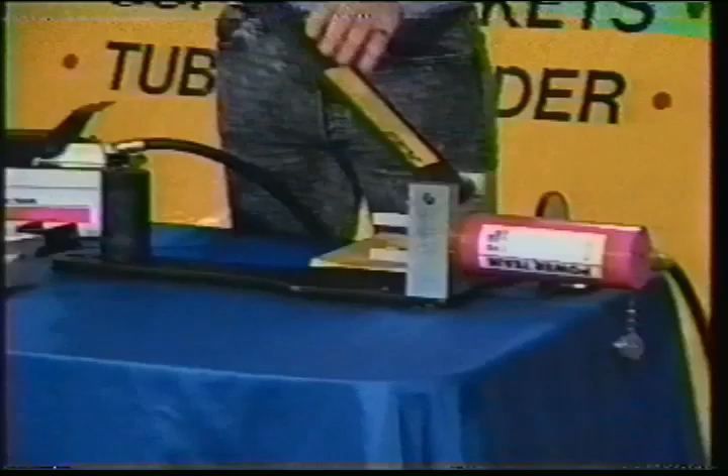First thing we're going to cover is the actual bender itself. The bender has the ram up here, and it's a 25-ton ram, which is what actually does all the work. It's bolted onto the framework here, and if you notice, this top arm of the framework actually opens up, allowing us to load and unload the shoe, the follow bar, and the tubing itself.

The shoe—this is a 1.5 inch shoe—is made out of a solid piece of aluminum. This is a lifetime shoe; this puppy's not going to break on you. When we load it in, we just line up the hole on our ram and our shoe, and we drop in the pin.

Next comes our follow bar, set up with these two little tabs on it. The tabs keep the follow bar the same height off the surface as our bending shoe. Then we can lower the arm and drop in the pin. Later on, when we load in the tubing, we'll also be putting in the horseshoe, which fits right here on the front and will actually hold the tubing.

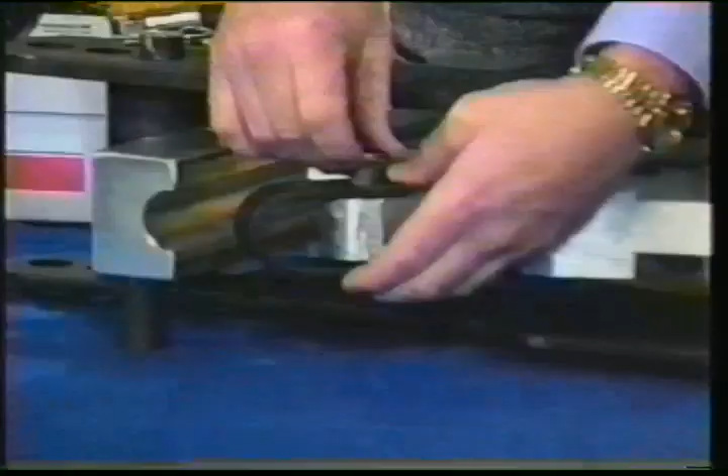The whole thing is run by our pump here, an air-over-hydraulic pump. This means there's a hydraulic reservoir down here on the bottom. When we put the air to it, the air is used to pump the hydraulic fluid around and expand the ram, which drives the shoe down. When we release it, we just kick it forward and it'll slide right back. This automatic release is a real nice feature.

What that allows you to do is make your 90-degree bend, and when you're all through, you can just release it and it will pull the ram all the way back. When we get into checking spring back, which we'll be doing in a few minutes, you just need to come up and release it and then right back down. What we're doing there is taking the pressure off the ram, but we don't want the ram to retract all the way back down.

I need to cover a couple things here that are real important. This ram generates up to 25 tons of pressure. This pump can generate up to 10,000 pounds per square inch of pressure. Both of these need to really be respected.

Make sure that all of your pins are in and pushed all the way down. The other thing is, take good care of your hydraulic hose here. Don't be dropping material on it, don't be scraping it up. If it gets worn, replace it. Do yourself a big favor and replace it and keep it in good condition.

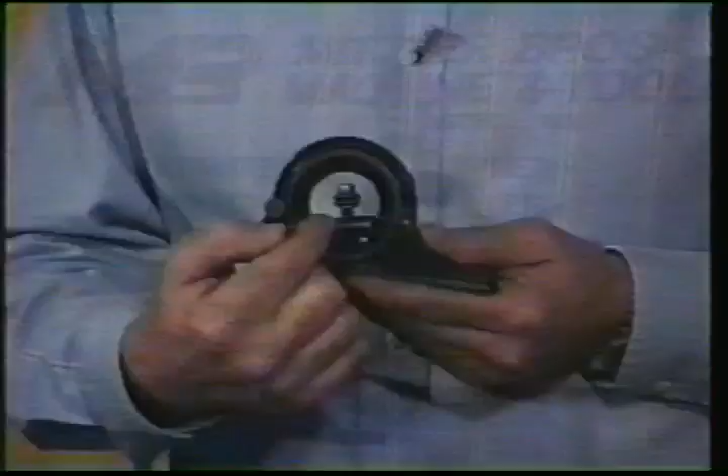If you want to upgrade a little bit, you can go to the Starrett. The Starrett has a bubble here on one side. On the back side, it actually has the degrees marked out so that you can loosen it, change your degree, find exactly what you want, tighten it up on the back side, set it down, and read the bubble.

The one that I choose to use is the digital angle finder, by Smart Level. It accurately reads to half a degree what your angle is. The nice feature is when we get into springbacks, you can dial your spring back in exactly. When we flip this upside down, you'll notice that the reading flips upside down with us. Those are just a few of the things that will make your bending much easier.

Since we've got all of the tools covered, let's go to the whiteboard and talk about some other terms. Here's a few more terms we need to be familiar with, so we're all on the same wavelength: stub height, leg length, radius, developed length, gain, and setback.

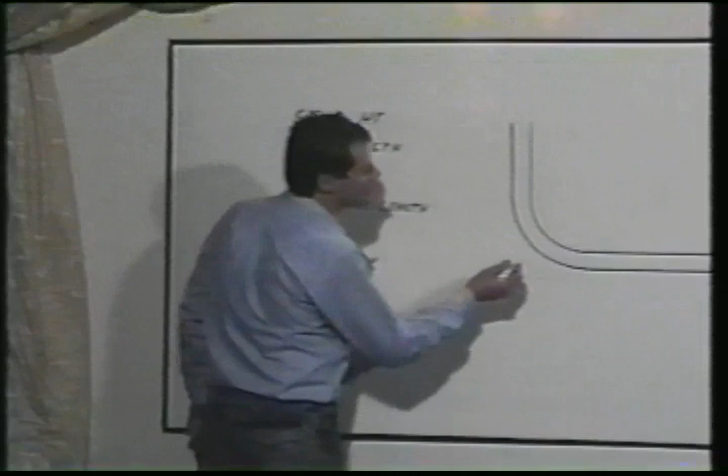When we refer to stub height, which can also be called stub up or rise, all we're talking about is the length between the bottom of the pipe or tubing up to the top. So it's this vertical measurement here, and that part is our stub up, our stub height, or what we call our rise.

When we talk about leg length, it's the horizontal measurement - the back of our tubing to the end of our tubing. We won't be referring to leg lengths very much in this video, but it's something I think you need to be familiar with.

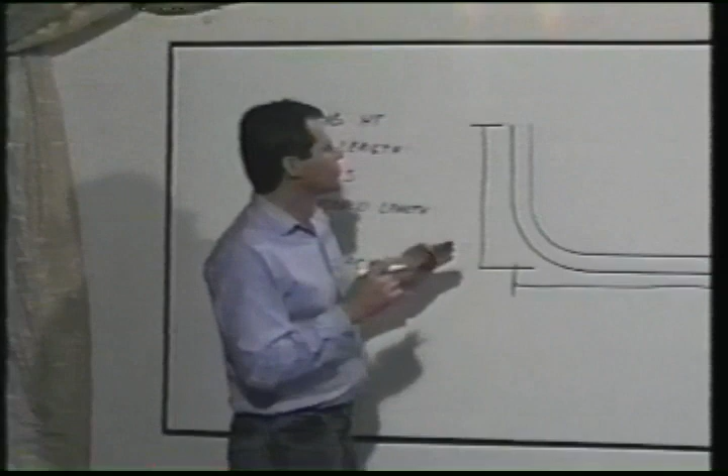When we're talking about radius, the actual formal name for this is centerline radius. We're going to assume that anytime we say radius, we're talking about the centerline radius. So in our bend here, it would actually be the center of our tubing, and it would look something like this - this is our centerline radius that we'll refer to as our radius.

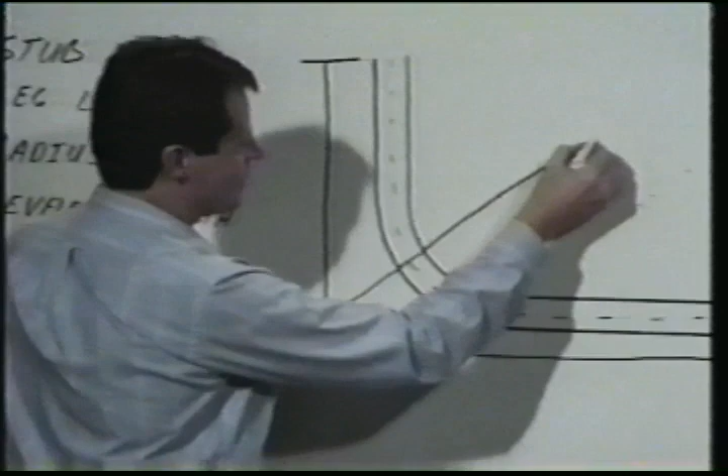Now, the radius is measured from the center of our tubing out here to a point that's on a 45. So when we say a 7-inch radius, we're talking about 7 inches from the center of this tube out to a point. If we're talking about an 8-inch radius, then this distance would be 8 inches.

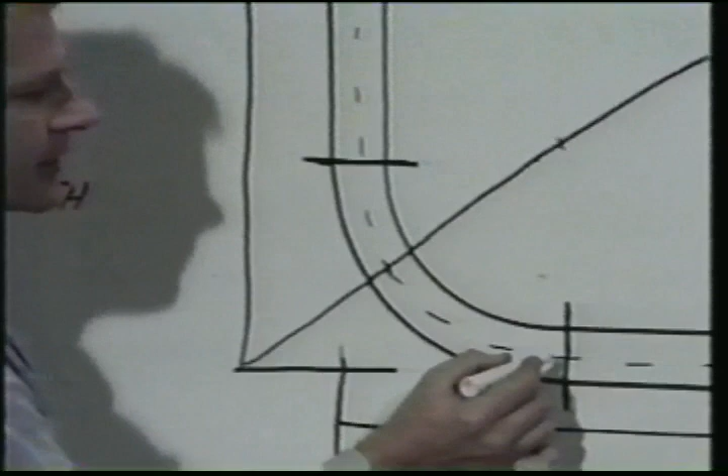When we talk about developed length, we're talking about the actual amount of tubing that's being bent in this process. In our example here, the tubing starts to bend right about here, and it finishes bending right about here. This is also measured on a center line. So when we say that we have 12 inches of developed length, what we're talking about is there's 12 inches of tubing being used to actually bend this bend up. From here up it's straight, and from here back it's straight.

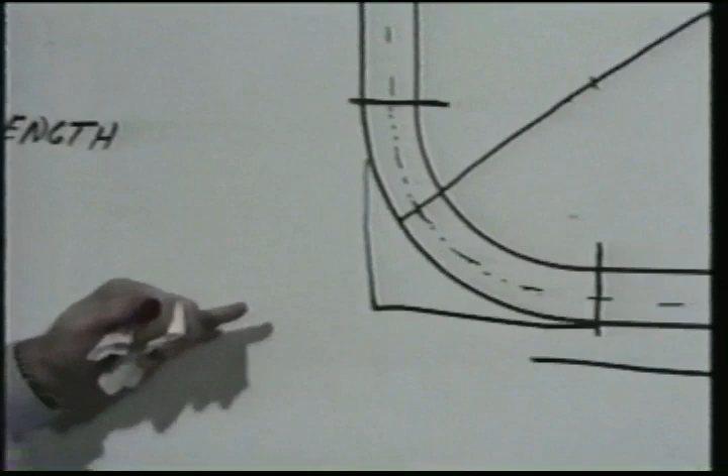The next thing on our list is gain, and gain is probably the most misunderstood thing when it comes to bending principles. And it's really pretty simple. If we had a straight piece of tubing here, and we bent it at a 0 radius, 90 degrees here - in other words, we came straight down, bent it, and went straight out this way - it would be a longer distance between here and here than it would be by cutting across here.

This is like when you were in junior high and you're racing your buddy home, so you're running down the sidewalk and you get to the end of the block. You choose to go clear down to the end of the sidewalk, staying on the sidewalk, turning and going up the next block. Your buddy, he's a little ahead of you, and then all of a sudden he veers off and cuts across the neighbor's lawn. So what he does is he gains some distance on you. He comes out way ahead of you because he has a shorter path to go than you do by staying on the sidewalk and going clear around.

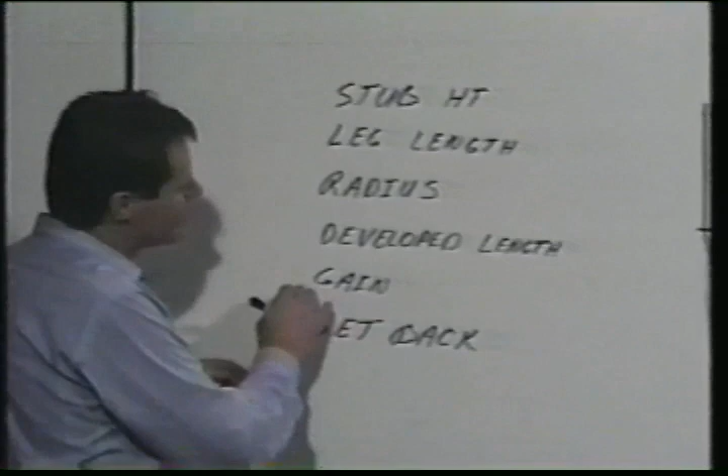Both gain and developed length, we have some very set formulas that we can actually figure out exactly what the gain and the developed length are for any bend that we choose to. We'll cover those a little bit more in detail later on.

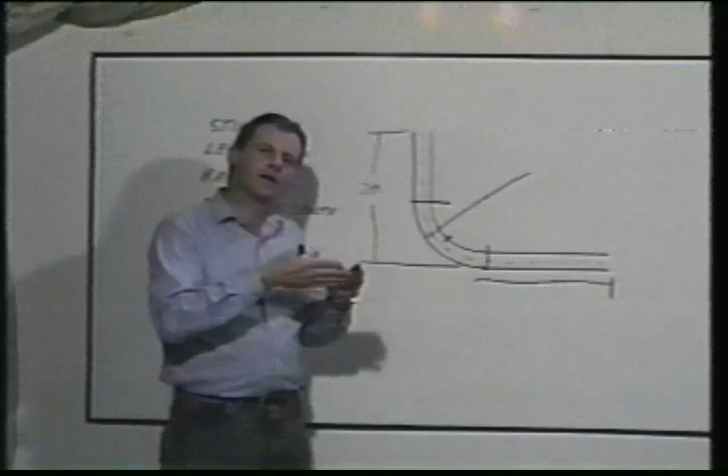That brings us down to setback. What setback is, is the distance that you subtract from your stub height to get your shoe to start bending in the proper place. So if we came down here and we wanted a stub height of 20 inches between the top and the bottom here, we couldn't go out and put a 20-inch mark on our tubing, start our shoe there, and bend it up. We would come out way over.

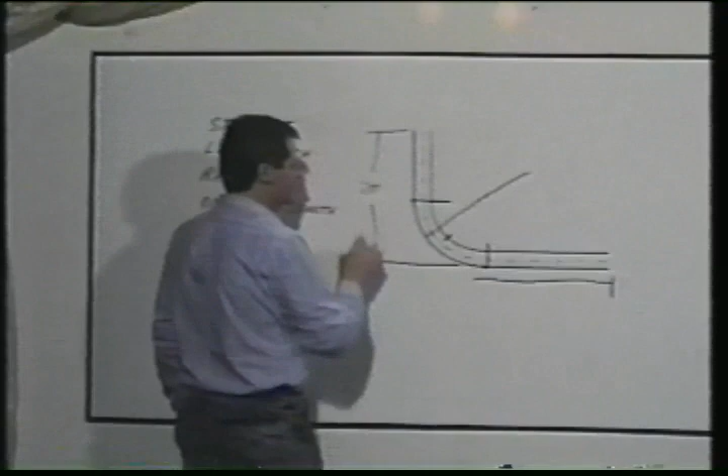The reason we would come out way over is because of the developed length and the gain that we talked about earlier. Remember, the center of our bend is right here. From here up to here, we have 1/2 of the developed length. Since our shoe starts bending at this point, we have to subtract 1/2 of this developed length from our 20 inches. Plus, we would have to subtract the gain, the shortcut here, from that 20 inches. We'll be dealing with this a little bit more in depth later on.

There's 2 ways to actually figure this setback out. One of them is mathematically, the other one is a practical application. What we're going to do is we're going to go put a 10-inch mark on our tubing. We're going to put that on the bend line on our shoe. We're going to bend this up at 90, and the difference between the 10 inches and what we come up with as a total stub height after we make that bend is going to be the setback for that particular shoe.

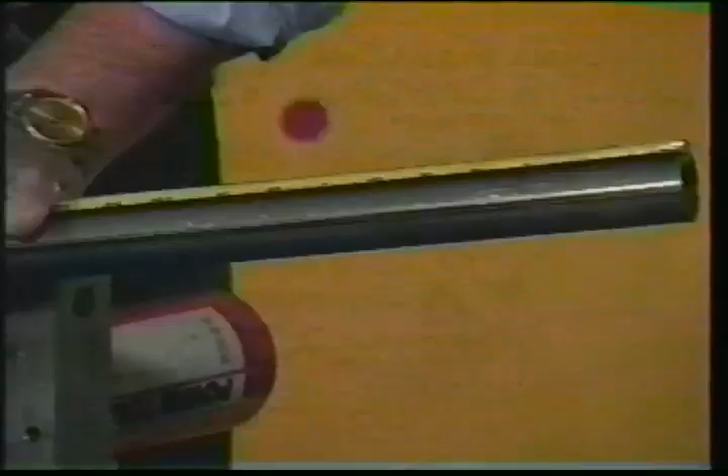Now we're going to get down to some real serious stuff. We got our sleeves all rolled up and we're going to find our setback. To find the setback, the easiest way to do it is just take a piece of tubing and we'll come down here to 10 inches and we'll make us a mark. And I always like to take and circle a bend or a cut mark. That way it makes them real easy to find.

After we've located our mark, we're going to go ahead and load the tubing into the bender. We just take our horseshoe here, and we don't worry too much about the mark. We slide our horseshoe on, drop our pin in, and then pull it back. Now our mark is right here, and what we're going to do is we're going to line that mark up right even with the face of this step. That'll always be where our start mark goes.

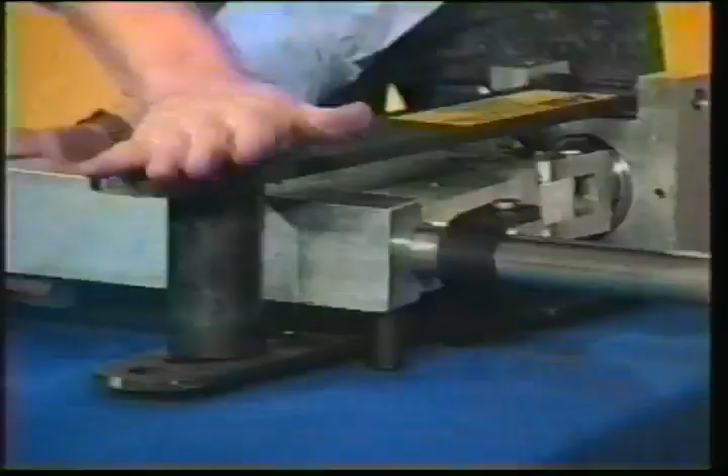Once we've got that done, we'll put in our follow bar. Our follow bar needs to line up so that it's also even with this face. Once we get it in, we line up our roller, drop our pin in. At this point, we're going to stop and make sure that the pin for our shoe, our horseshoe, and our follow bar are all the way down. Now we're going to go ahead and put some pressure on it.

We're starting to bend there. At this point, we want to stop and stand the bender up, and the reason is so that we can accurately read our measurements on the degrees. We want to have put quite a bit of pressure on so that when we stand this bender up, all of our pins stay right where they belong.

The other thing we want to do is raise this up, the back end up, so that it's level. So we'll bring some blocking in here and put our little torpedo level on here. We're a little bit short, so I'll throw my pencil in, and that brings this right to level. Now we can go ahead and take our smart level and just wait for us to come up to 90 degrees.

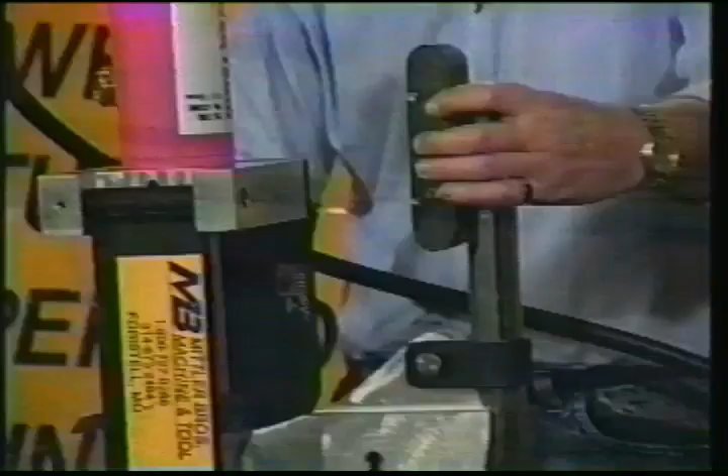What we're going to do here is actually go past 90 degrees. And that's our 92 degrees right there. Now that we're at 92 degrees, we have to release the pressure on the ram to take out our spring back. As we said earlier, you just want to hit the release button and make sure it doesn't stay down, because that would retract the ram all the way, and that's not what we want to do. So we'll take just a little bit of the pressure off, go over here and check. Our leg here is still level, and there we've got a 90-degree angle.

Now we have to measure it. So to measure it, we got to get it out of the bender first. So we'll be laying everything back down on the table.

You're going to notice that there's a lot of possibility of finger pinching here. Many times bending is done with a couple of guys around, and they always want to reach in there to help you out. If you want them to remain good friends, please don't allow them to. Only one set of hands on the bender. This is an ironclad rule, because with opening and closing these things and moving everything around, it's real easy to get your finger in there, and if your buddy thinks this piece of pipe needs to be raised up a little bit and he raises it, squash — you're no longer friends. So what we're going to do is take this out, get the bender off the table, and measure to see what our stub height is.

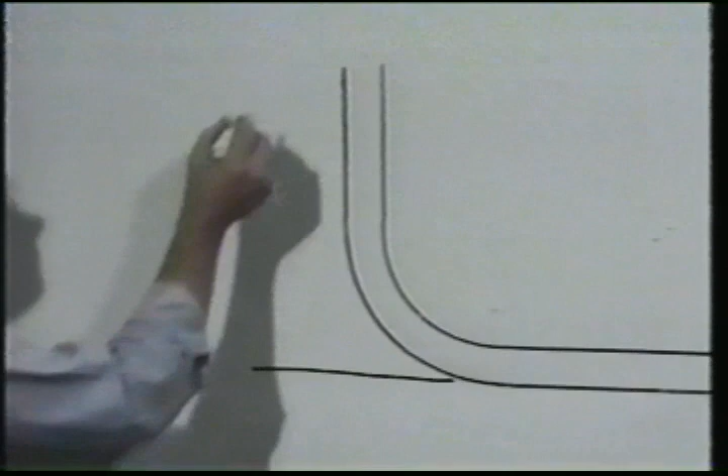We want the distance from the top down here to the bottom to be 12.5. All we have to do is take our clean piece of tubing here, measure from the end of the tubing back 12.5 inches, and make a line. Then we'll take our setback, deduct our 8 3/16 of an inch, and that will be our start line on our bender. That's all it takes.

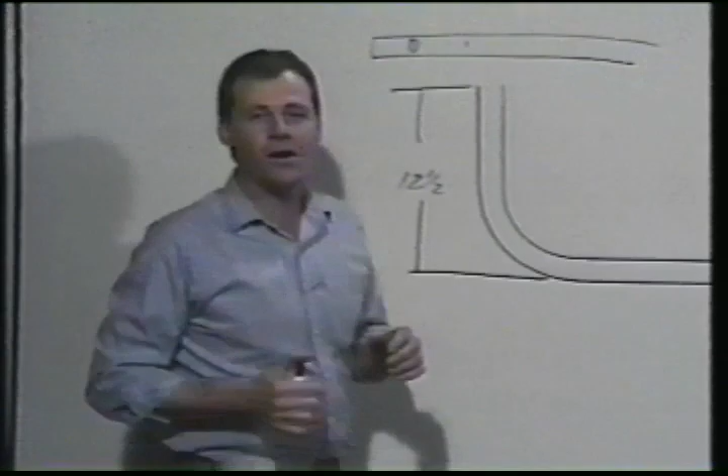To lay out our 12.5-inch stub height on our pipe, the first thing we're going to do is come down here and make a line at 12.5 inches. This is not going to be a bend line, so we're not going to circle it.

To get our 8 3/16 deduct in there, we're going to use a process called cutting an inch. It's very difficult to get the very end of the tape right exactly on the line. So what we're going to do is line up our 1-inch line with our 12.5-inch line. So we've cut or deducted an inch on the front.

So we're going to go back here, and instead of making our mark at 8 3/16 of an inch, we're going to make it at 9 3/16 of an inch. So what we did was we deducted an inch on the front, and added an inch on the back just to make things easier.

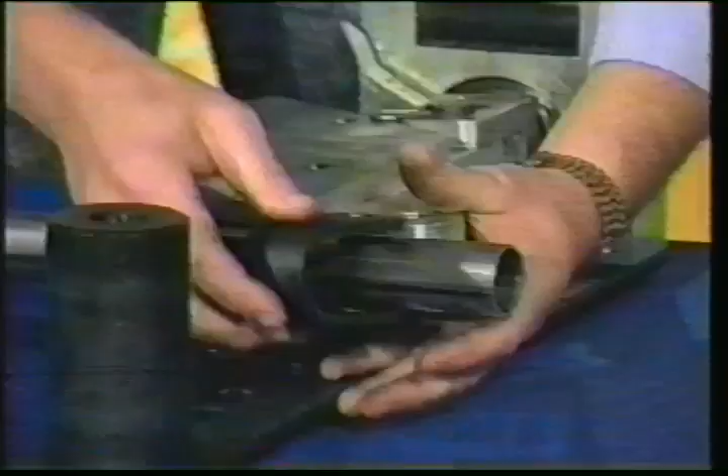So now we have our 12.5-inch line minus our 8 3/16 for our setback. We'll go ahead and chuck this up in the bender, put on our horseshoe, and drop in our follow bar, and we're ready to bend.

After we get our follow bar in, we want to make sure that our pipe and our follow bar are both at our bend line. Go ahead and slide the roller in here, drop in that pin, and put some pressure on it.

You notice that we lost a little bit here when we got down close, so we have to readjust things, making sure our line for our start bend is right on the place, the raised section of the shoe, and our follow bar is there, and we're ready to bend.

Now comes the time of truth. Did we hit our bend? What we're going to do is measure it up, same way as we did before. We want to measure from the back of the pipe here to the top of our stub. So we take our straight edge, set it back there, and we measure up, and we came out to 12 3/8 inches. So that's within 1/8 of an inch of what we wanted. That's well within our plus or minus 1/4 of an inch for accuracy.

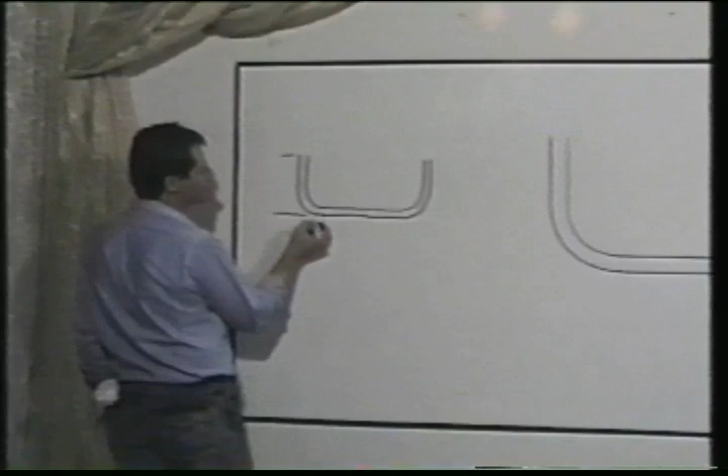To make a U-shaped bend or a hoop or a back-to-back bend, we're just going to repeat the same process. What we're shooting for here is we want this hoop or U-shaped bend to have legs from the bottom to the top of 12.5 inches.

So we've already bent up one piece. We have the piece here. We want this side over here to be 12.5 inches. And then we want from the back of this one to the back side of this one to be 36 inches. So this is 36 inches overall.

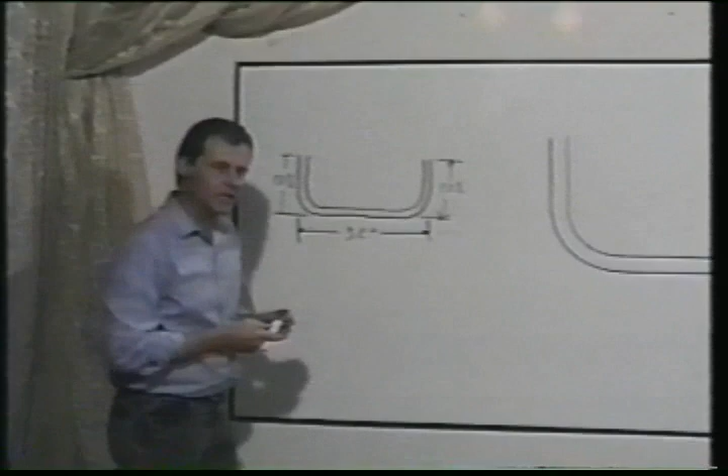To accomplish this, we're going to use the same thing that we did over here. So all we have to do is, before we wanted this to here to be 12.5 inches. We laid it out at 12.5 and we subtracted our setback, or our 8 3/16.

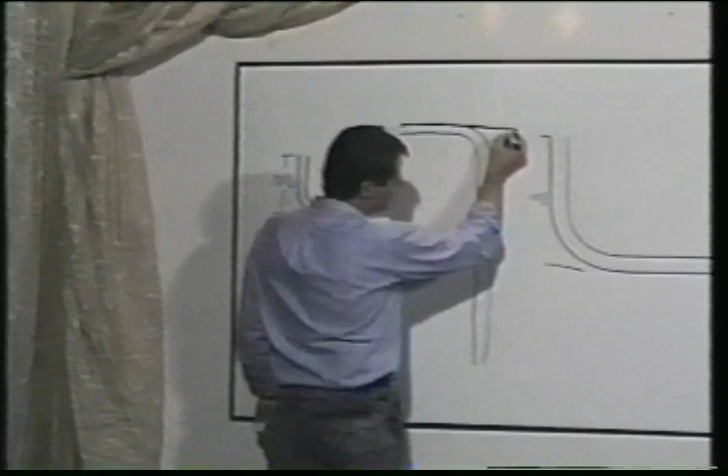To make our U-shaped bend, we're going to lay our tubing in here like this. And we're going to take a straight edge and put it right along the back side here. That's going to be our measuring point. That's going to represent the same as the end of the tubing on our first bend. Then we're just going to come down here at 36 inches, and we're going to make us a mark.

Then we take from our 36 inches and subtract our setback of 8 3/16 of an inch, and that becomes our bend line. So when we put this in the bender, this is where the bend line goes on our shoe. When we lay out for our U-shaped bend, we want to make sure that our straight edge goes right against the outer part of our bend here.

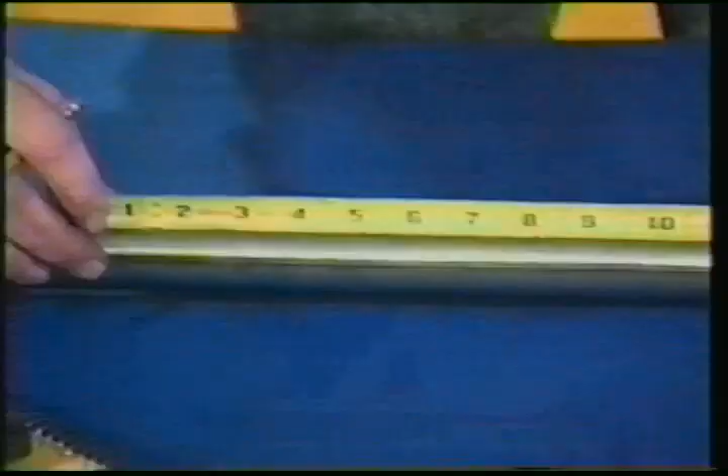So pull that up tight, take our tape, and we're going to lay out for 36 inches. We put our 36-inch mark on there. Again, that's not a bend mark, so we're not going to circle it. Then we take and deduct our 8 3/16 inch setback, and this is going to be the bend.

Once we find our bend mark, we'll go ahead and chuck it up in the bender and give it a try.

When we've got it all chucked up in the bender and our bend line right where we want it, then because we're making a U-shape, we're going to have to level a couple of things. The things we're going to have to level are the ram here. We put our level right on the ram and make sure that it's running level.

Now we're going to go over here and actually level our stub that we've already bent. We've got just enough pressure on the ram to hold it and yet not hold it too tight that we can't adjust it. Once we've got both of these level, then we'll go ahead and bend it up.

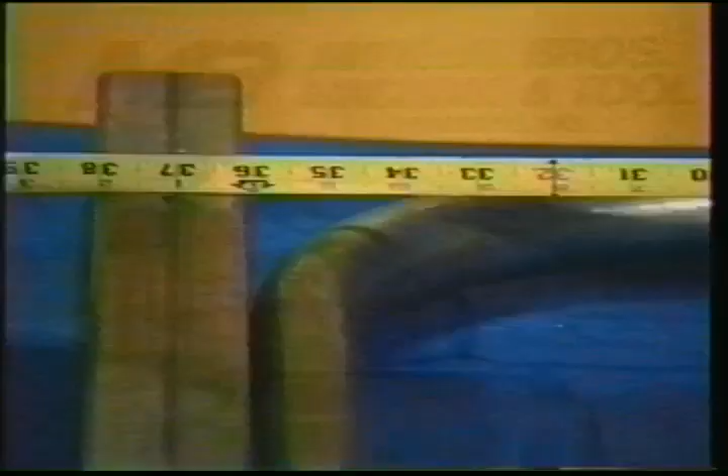Now it's another moment of truth. Did we hit our bend? This time we've got to have a straight edge on the left and a straight edge on the right. We want 36 inches between these two straight edges. So what we do is lay it out here, make sure our tape's running straight, and we got 36 1/16 of an inch. Boy, we're getting a little better at this.

Now we want to make sure and record all this information in our bending book. Then we're ready to trim our end here. We want it 12.5 inches, just like this side. So all we do is lay our straight edge on here, come over, put our 12.5 inch mark here, and that's going to be our cut line.

So what we've done is we've bent a U-shaped bend. We got this to come out to 12 3/8, and we were shooting for 12.5. We wanted it 36 inches wide, and we're a 1/16 of an inch over there. The only thing we did is make one trim here. That's pretty good bending.

We've just seen how we can do things the practical way. Now I'm about to show you how you can do it mathematically. And I'm doing this because I wouldn't feel good going home tonight knowing that I didn't complicate your life just a little bit. So when we do it mathematically, there's a couple things we have to work with.

One of them is the developed length, the other is the gain. Remember that the developed length is the amount of tubing that's actually being bent, so it would be this amount of tubing right in here. To find the developed length for any bend, it would be...

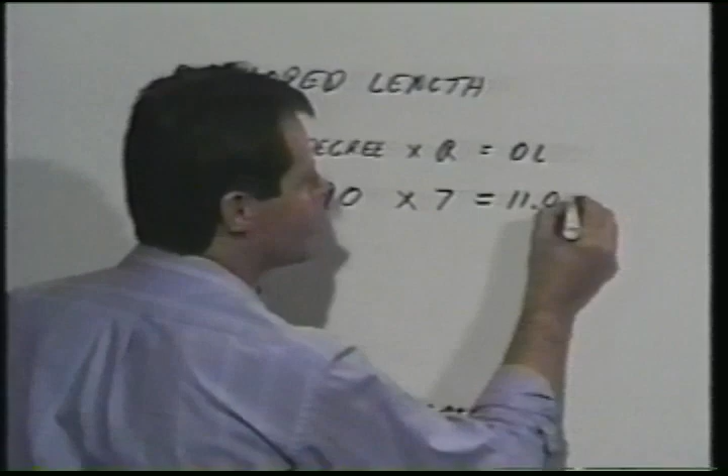0.0175 times the degree of the bend times the radius equals your developed length. So in the example we're using, it would be 0.0175 times 90, that's the degree we're bending at, times our radius. We're using a 1.5 inch shoe with a 7-inch radius. If we did all that math, it would come out to 11.025. We also need to know half of that developed length, so we just divide that by 2, and it comes out to 5.5125. What that tells us is 11.025 inches is going to be used from this point around to this point.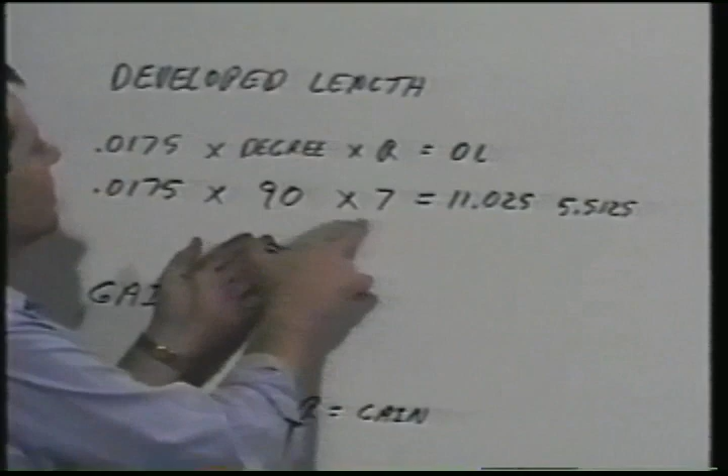If we were to change and do a 60-degree bend, it would be the same thing: 0.0175 times 60 times the radius of the shoe, which is 7. We would do that math and come out with the developed length of a 60-degree bend.

Let's say we would change shoe sizes and went up to a 1 3/4 shoe with an 8-inch radius. If we were going to bend it on a 90, it would be 0.0175 times 90 times 8, and that would give you the developed length for an 8-inch radius.

The other thing we need to concentrate on is the gain. The gain, you remember, is just the distance that we save by cutting across the lawn instead of going around the sidewalk. To figure gain, we need to get our gain factor chart.

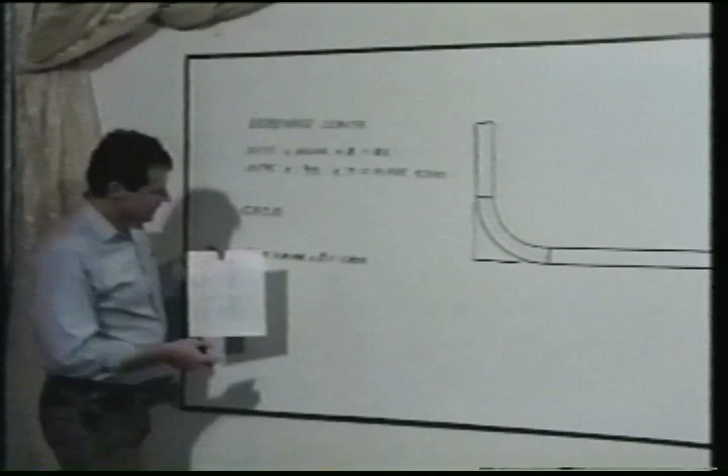And don't worry, this chart will be listed at the end of the video, and you don't have to try and memorize it now. So all we would do is we would run down here to 90 degrees, we would look across, and the gain factor for a 90-degree bend is

0.4292. Once we have that figure, we would plug that into our formula. So it's 0.4292 times our radius, which is 7. We would do that math, and that would equal 3.0044. And that would be the gain on our bend.

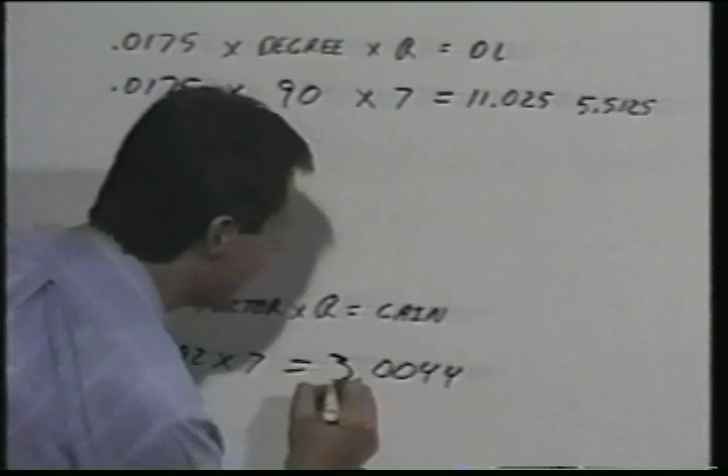If we did happen to change this and say we wanted to bend a 45 on a 7-inch shoe, we would just run down our gain factor chart till we got to 45 degrees, go across and get that factor and plug that into our formula.

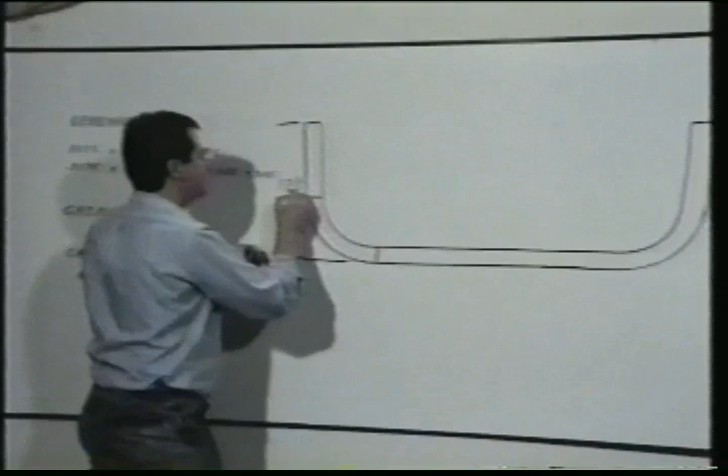Once we have our figures here, then we can go over here and figure out what it's going to take. You remember our distance on our stub height was 12.5. So we would take that 12.5,

then we would take half of our developed length. Now you remember the center of our bend is right here, and half of our developed length goes from here to here, and half of our developed length goes from here to here.

We're going to start with our shoe up here, or start at the beginning of our shoe up here, so we have to subtract half of our developed length, which is 5.5125. Then we have to take off our gain.

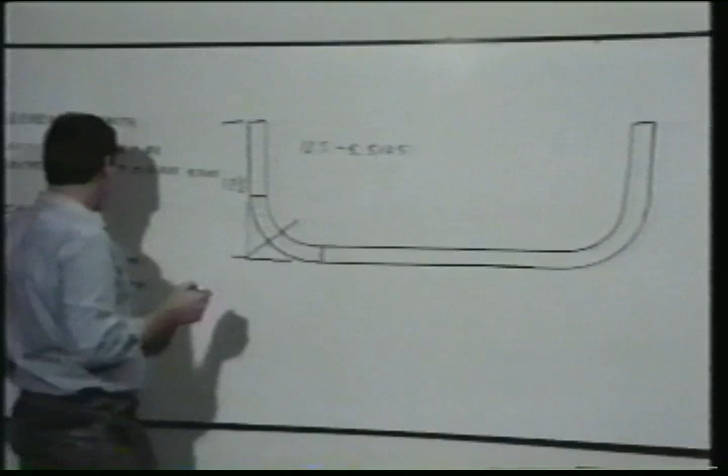Remember, we saved some tubing by cutting across the lawn rather than going around the sidewalk, so we have to deduct our gain. So that would be minus 3.0044. So what we've done here is we've taken our 12.5, backed up half of our developed length plus half of our gain, or our full gain.

If we did that math, that would come out to 3.9835. Now, to find the start mark for our second bend, we would take our same 12.5,

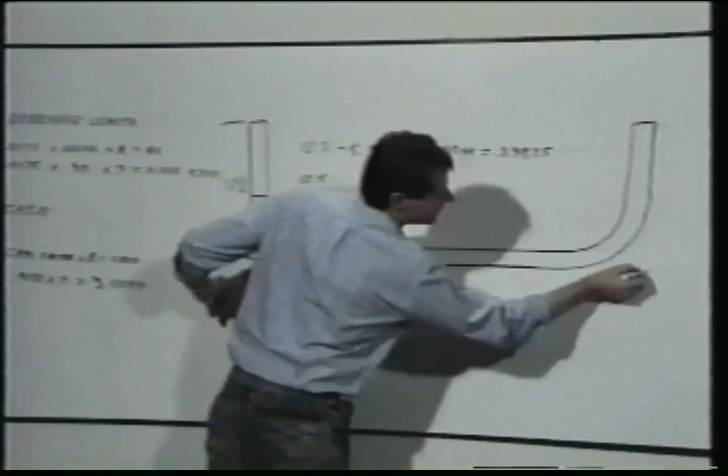then we would add to it just 36 inches here. And we would plus 36.

Now we have to take half of our developed length, because we have the same situation here, back up half of our developed length, which is 5.5125, minus our gain for this 90-degree bend, which is

3.0044. But we also have a gain down here on this first 90-degree bend. So we have to subtract that also. So that'd be minus 3.0044. When we did all that math, it would come out to

36.9787. That would be our two start marks. So what we could do is we could go out in the shop, we could take a piece of tubing, and we could lay out those two marks.

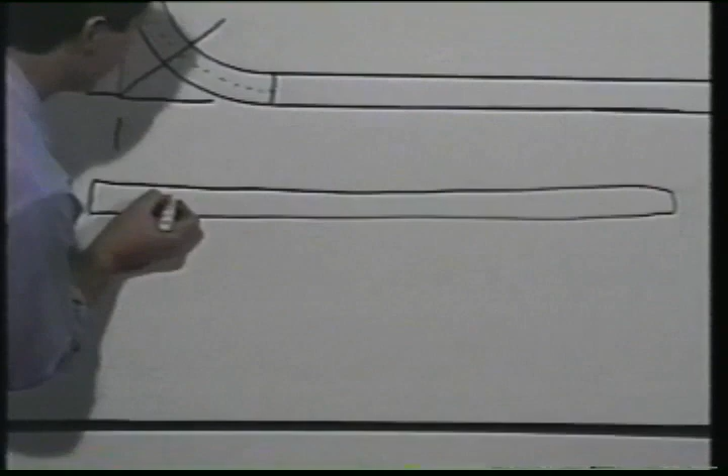The first one, 3.9835, we just come down here to 4 inches, and that would be the start mark for our first bend. Then we could go down here 36.9787, or basically 37 inches, put in our second start line for our second bend.

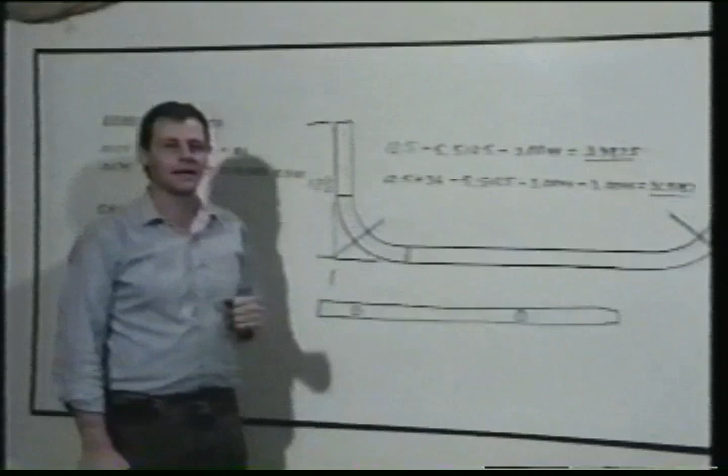We could bend those up, and we would come up with the same thing that we have here before we trimmed it. Now you'll notice that doing it the practical way is a little bit easier. This stuff we'll get into a lot more when we cover multi-bends. You'll also notice that there's a little bit of discrepancy between the mathematical and the practical way of doing it. That's what I was talking about this plus or minus. Anyway, this is food for thought that we'll use a little bit later on.

Now that we've become so proficient at bending 90-degree bends, we're going to work on offsets. And the first thing we have to establish is that all offsets are measured center to center. So when we talk about a 10.5-inch offset, we're talking about it being measured from the center of this tube to the center of this tube up here. That would be our 10.5 inches.

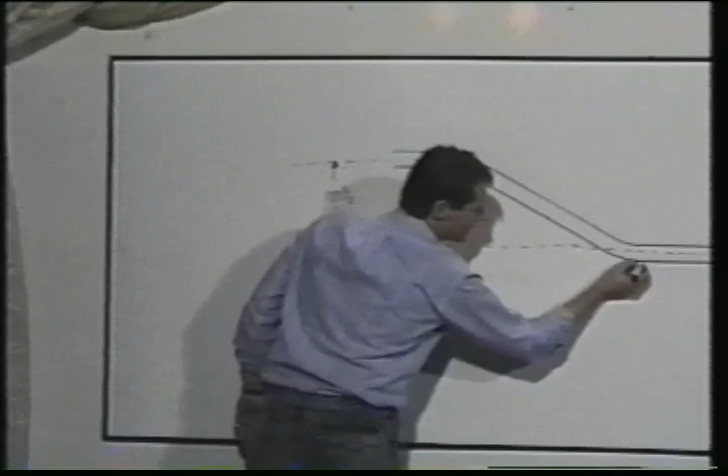It's pretty difficult to measure from the center of a tube to the center of a tube, though. So what we can do is we can go down here. We can measure from the bottom of this one to the bottom of this one, and that'll be the same measurement, because what we're doing is we're coming from the center to the bottom and from the center to the bottom. We could also go up here and we could measure from the center or top of one to the top of the other.

This would be our same 10.5 inches, because we're going from the center to the top on this one and from the center to the top on this one. So it's easiest to measure them bottom to bottom.

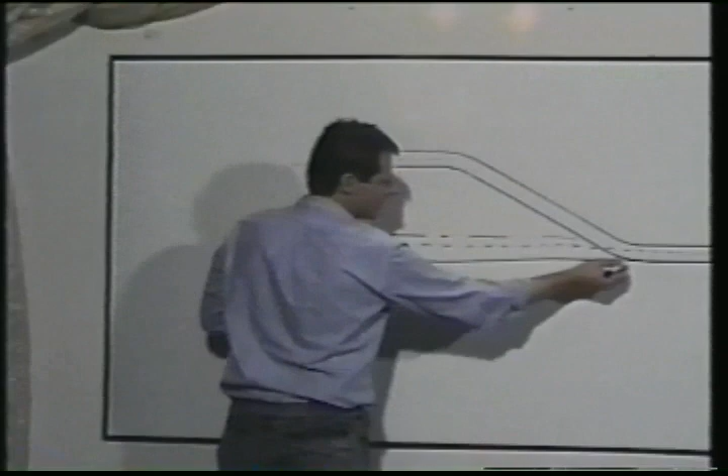Now that we've figured out how to measure them, let's talk about how to bend them. When we lay out for an offset, the first thing we need to establish is how much offset we need.

So what we're going to do is come out here and say we're going to need a 10.5 inch offset.

Next thing we need to know is if we start this bend here, where do we start this one? To do that, we just go to our offset table here, and it'll give some multipliers.

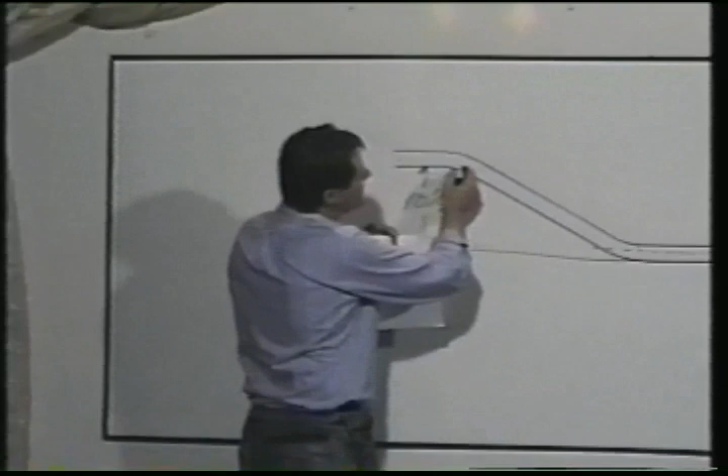If we're going to make this a 30-degree bend, then we would come down here to 30 degrees, we would look across, and we would see that the multiplier for a 30-degree bend is 2.

So we would just take our 10.5 inches, and we multiply it by 2, and that would come out to 21. So that tells us that our bends have to be 21 inches apart.

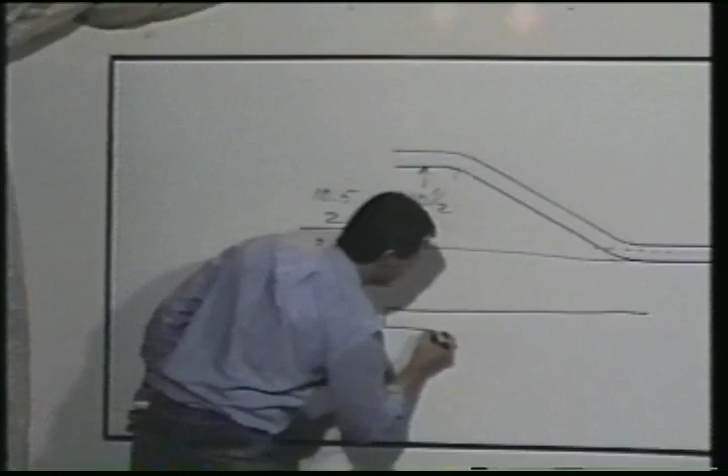So we could go out here in the shop, we could take a piece of tubing, and we would go anywhere along this piece of tubing, and we could make our first bend mark. Then as long as we went 21 inches from our first bend mark down the tube to our second bend mark,

we would be okay. So we could chuck this up in the bender, bend it 30 degrees here, flip it over, bend it 30 degrees here, and we would come out with a 10.5 inch offset.

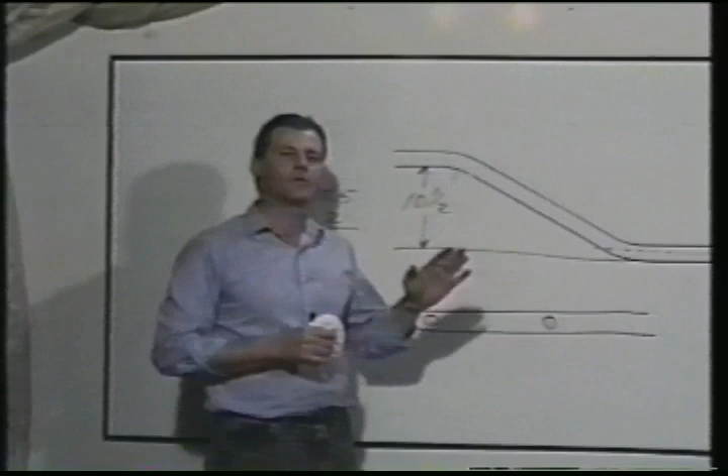If we chose to do a 45-degree offset, we would do the same thing. We would go to our offset chart, we would run down to 45 degrees, we would look across, and the multiplier would be 1.41.

So then all we do is we take our multiplier of 1.41 and multiply it times our 10.5, and when we did that math, it would come out to 14.8 inches. So that tells us if we're going to bend this on a 45-degree angle, that our bend marks, instead of being 21 inches apart, need to be 14.8 inches apart.

Now we need to discuss a little bit about gain in offsets. If you're bending from 30 degrees down, so 0 to 30 degrees, there's not enough significant gain to really worry about it. If you get over 30 degrees, you need to start worrying about it a little bit.

On this particular offset, if we bent it without figuring in any gain, we would probably come out about 1/4 of an inch over. So on a 7 or 8 inch radius shoe, if you're bending around a 45-degree offset, you need to subtract about 1/4 of an inch.

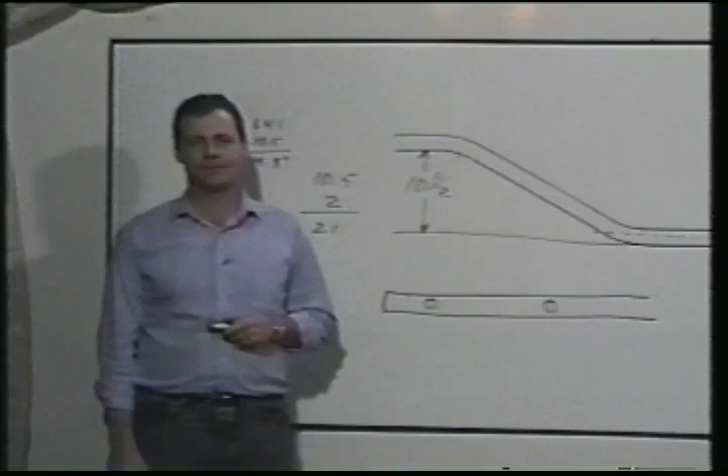Laying out our offset requires 2 bend marks. So we're going to go ahead and put the first one here at 5 inches. And to make sure we know it's a bend mark, we'll go ahead and circle it.

Then we go down 21 inches between the first one and the second one and put our second bend mark here. Our second bend mark needs to be transferred to the other side of the tubing, because after we bend our first one, we're going to actually turn the tubing over 180 degrees to bend our second one. So after we transfer it around, we circle it. Let's chuck it up in the bender and bend it.

We've got our piece of tubing in the bender on our first mark. We bent it up to somewhere around 20 degrees. Then we stood the bender up.

Now we have to level the ram and make sure that it's perfectly level. Remember, we're going to be turning this piece of tubing over 180 degrees for our second bend. To keep out the dog leg, we want to make sure that the ram is leveled, and we have to have something back here on the back part of the pipe to make sure it gets leveled properly.

What I like to use is a piece of Kindorf, available from electrical contractors, and it's just a U-shaped track here with a Kindorf clamp that goes on it. We're going to actually clamp this piece of Kindorf right to the tubing back here. And as I said, this Kindorf and Kindorf strap are available from electrical contractors.

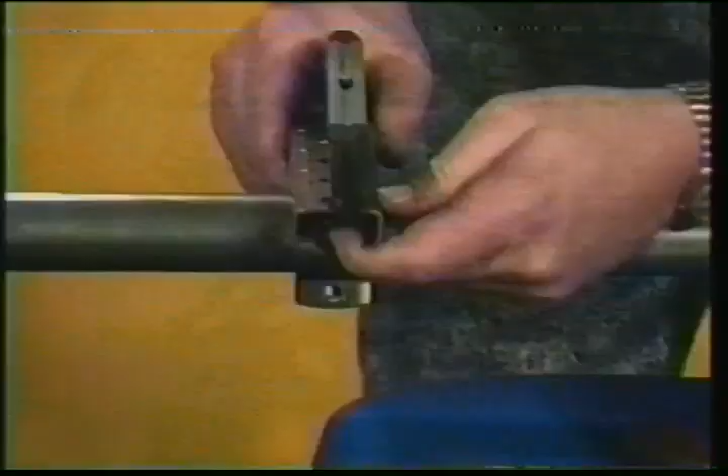We set our level right on here, and we just turn our tubing, or our Kindorf, until we're level. When we're happy with being level, then we go ahead and tighten it down good and snug. Now you notice this is back far enough that when we do our second bend, this Kindorf isn't going to be running into our follow bar here. After we've got that all done, we go ahead and complete our 30-degree bend.

Our spring back and check, and we've got our 30-degree angle, so we'll go ahead and rotate it and bend our second one.

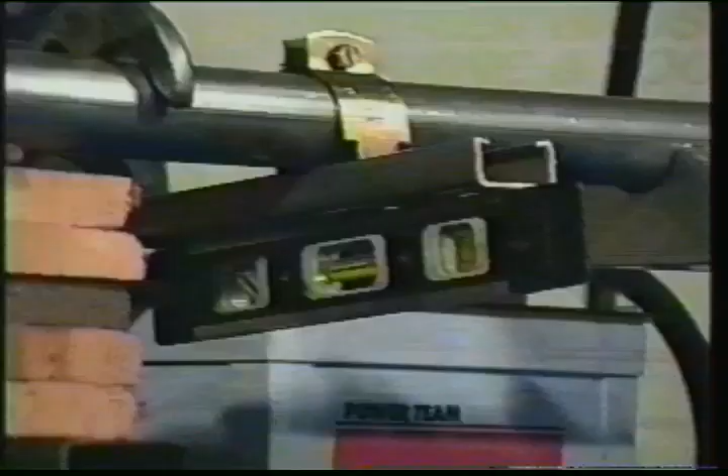We now have the bender set up with a second bend mark on our bend line on our shoe, and we've got just a slight amount of pressure on our ram. What this is going to do is hold everything in place but still allow us to level up our Kindorf. We want to first make sure that our ram is still level, and then we put our level down here on our Kindorf, and we want to take a pair of channel locks and actually turn the tubing. We don't want to be beating on our Kindorf because that's already been preset. So we set our channel locks on there, and we just twist this around until it's level, and then we can go ahead and really put some pressure on.

Okay, we'll stop right there. Make sure our back part here is still level, and we'll go up here, and we want this to be level. So we're right there. Take out our spring back, and we've got it level. So we'll take it out of the bender and see how close we came.

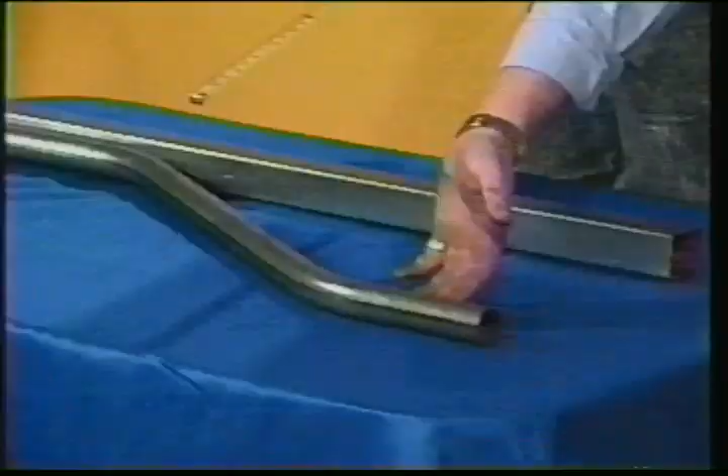Remember, on offsets, we measure center to center. So when we put our straight edge on the bottom part of the tubing here, then we'll be measuring from the straight edge to the bottom part of the tubing up here. We measure it out, and it's 10½ inches exactly.

If you can grasp and execute the concepts of this next bend that we're going to be doing, you will be able to bend anything, anywhere, anytime. In other words, if you get this, then you've got bending principles down pat. And I'm talking about really down pat. You'll be in the top 5% of people that use benders. And that's not the top 20, not the top 10, but the top 5.

What we're going to bend here is a series of bends, all on one piece of pipe. We're going to lay them all out before we ever start, and then we're just going to chuck them up in the bender and bend them boom, boom, boom, one right after the other. So when you master this, you'll have her down pat. All it is, is just a series of formulas that we're going to put together to find out where we put our shoe at.

Our project bend here is going to be a rear hoop, and it's going to be a 4-bend hoop. In other words, we'll have 180 degrees in 4 different bends. The material we're going to use is 1 3/4 tubing, and that's a change from what we have been using. We've been using 1.5 inches. Our specification here is it's going to be 39 inches from the center of our top piece here.

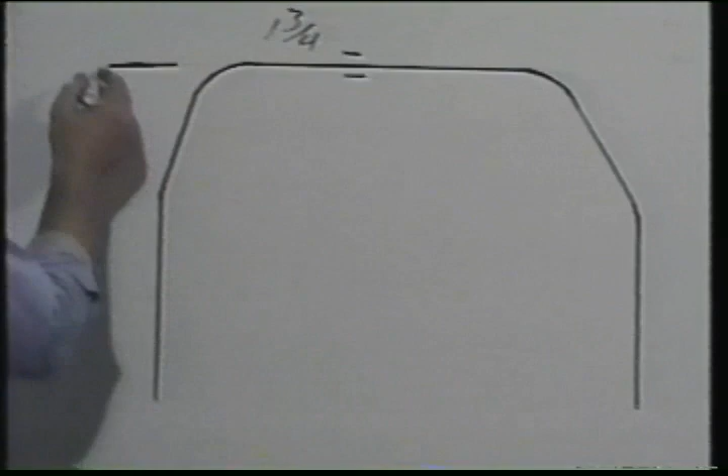So we're going to actually have the tubing laying in like this. So if you're going to measure from the top, you're going to have to add half the thickness of the tubing that you're using. But from the center to the bottom is going to be 39 inches. And then from the center of this leg to the center of this leg over here is 43.25 inches, excuse me. We're going to come from the bottom of this leg up 25 inches, and we're going to put us a 10-degree bend right there.

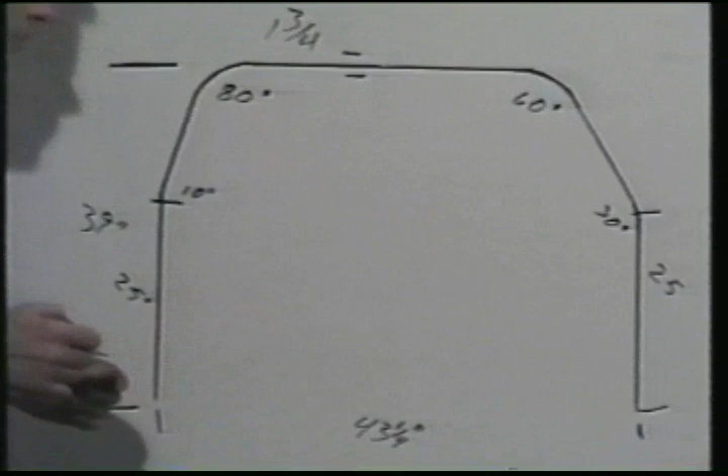Then we're going to go up here, and this is going to be an 80-degree bend. Over here, we're going to have a 60-degree bend, and down here, we're going to finish up with a 30-degree bend. This 30-degree bend is also going to be 25 inches from the bottom of the leg to the center of the bend. To start with, we're going to have to take and lay this out to scale, and we want it as exact and as close as we can get it.

So I like to do it actually full size, and that's what this big line here is representing, a scale model of what we're doing. We've got these actually 43.25 apart. We're 39 inches from here to here, and 25 inches to the center of this bend and the center of this bend.

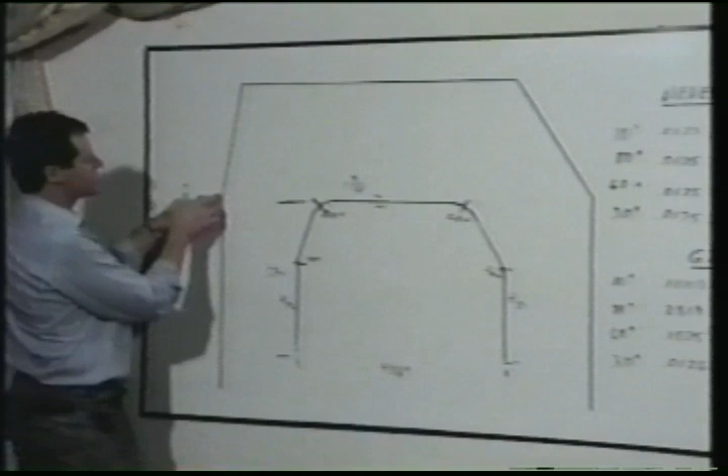Now you notice we have no bends here because the very first thing we have to do is find out where the center of these bends are. So to do that, we just run our line straight. To lay it out, we made these 43.25 apart. We came up 25 inches, took this line out 10 degrees. Over here on this side, we came up 25 inches, took a line 30 degrees up. Where these lines intersect are going to be the center of our bends. So when we get done, this thing will look something like this.

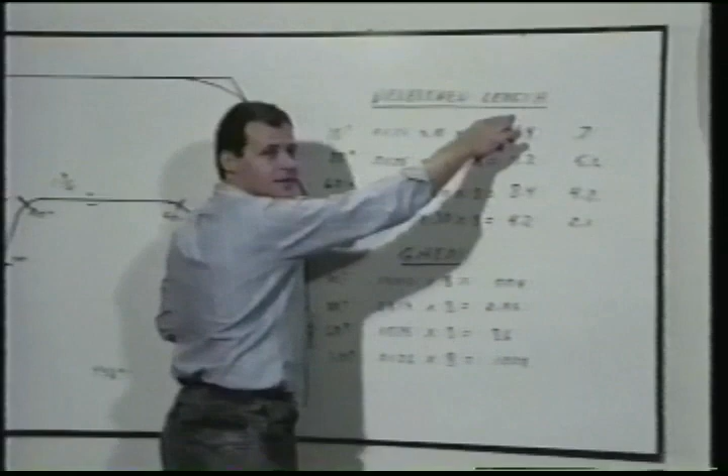To lay this all out and find out exactly where we put the shoe for each one of these bends, we're going to have to use some formulas. The first one is developed length. If you remember earlier, we said the developed length for any bend is 0.0175 times the degree of the bend. Since we're working with a 10-degree bend, it's times 10 times the radius. This 8 is the radius of the 1.75 shoe we'll be using, and that equals 1.4 when you do this math.

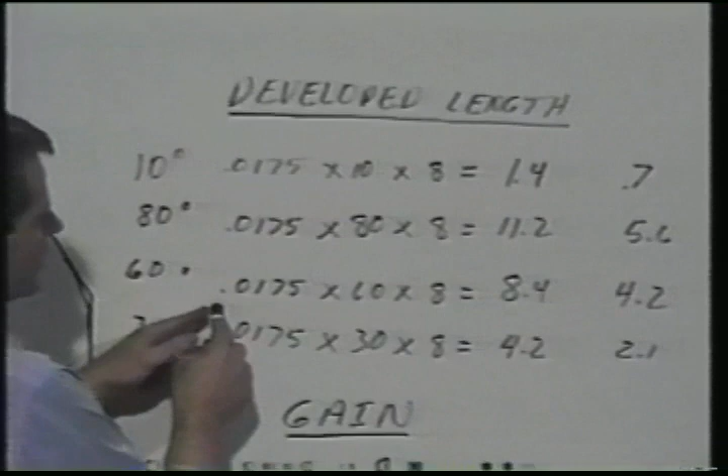We're going to need half of the developed length, so we use 0.7 as half the developed length. Down here on the 80 degree, same thing, we take our constant times the degree of our bend times the radius equals 11.2, half of that is 5.6. On our 60-degree bend, we come out 8.4 for total developed length, 4.2 for half. The 30-degree bend comes out the same, 4.2 and 2.1.

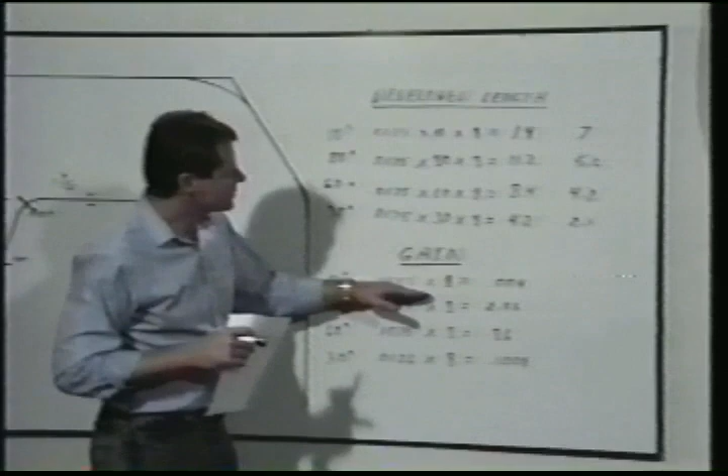The other thing we need is what's called the gain. Every time we make a bend, we gain pipe or tubing. To figure out our gain, we take our factor off the gain chart times the radius, and that equals how much material we'll gain. So we take our sheet, come down to 10 degrees, it tells us the gain factor for a 10-degree bend is 0.0008. For an 80-degree bend, it's down here, and it's 0.2819. Same thing with the 60 and the 30.

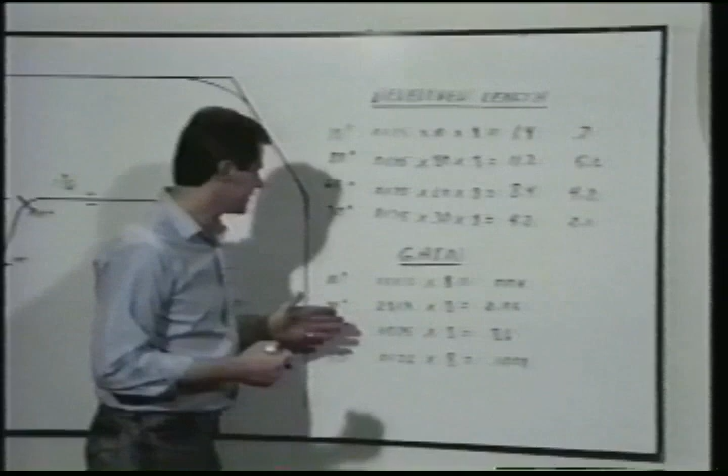So when we do all this math, we come out that the gain on a 10-degree bend is 0.0064. That's not really enough to even worry about. 80 degrees is 2.26, 60 degree is 0.86, 30 degree is 0.1008. Now you'll notice that the higher the degree of bend, the more gain we get. On our 10 and our 30, we have very small amounts of gain, but up here on our 60 and our 80, we're getting a lot more.

So now that we have these formulas, we can go back here and figure out exactly where we want to put our shoe. We'll take this off the board here real quick and write our formulas right in the center here.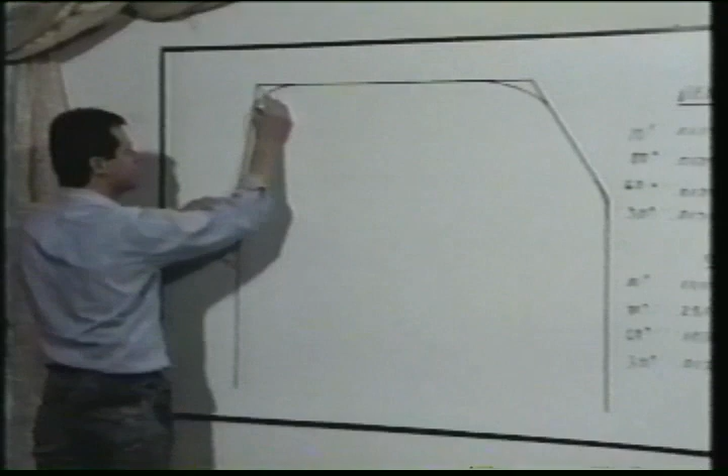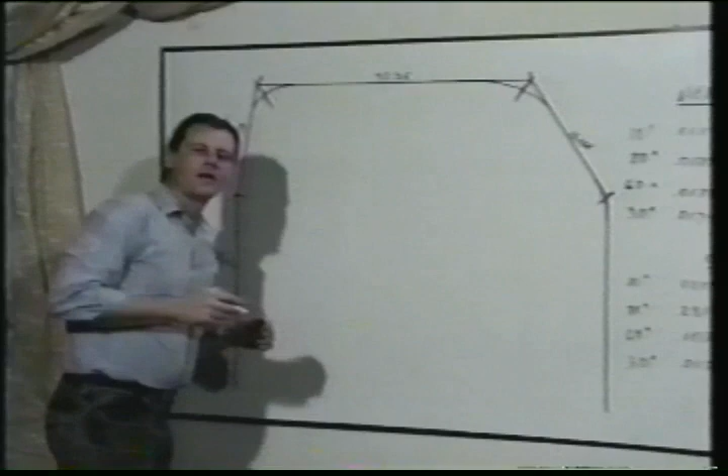After we have laid this out, we know that from the bottom to the center here is 25 inches. We measured from here to here, the center of the 80 degree bend, and that came out 14.19 inches. From the center of this bend to the center of our 60 degree bend is 32.25 inches. Then we measured from the center of our 60 to the center of our 30, and that was 16.125 inches. Once we have all of those lengths, then we can set about figuring out where we want to place our shoe.

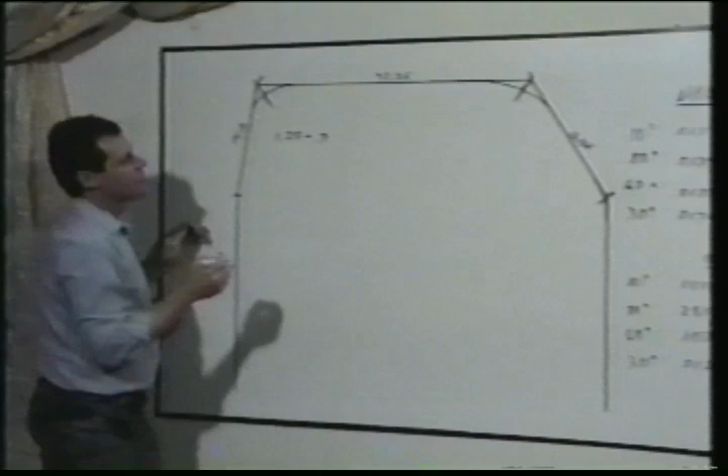So the first thing on our first bend, we take our 25 inches, and then we have to subtract half of the developed length. So we go over to our formulas, and half of the developed length of 10 degrees is 0.7. Then we have to take our full gain, well our gain is 0.004 -- that's not even enough to worry about.

So again, we take this length to the center of our bend minus half of our developed length, because remember the shoe is going to start here and end here. So we have to take half of that minus our gain. Since our gain is virtually nothing, we're going to take that out of our formula for this one, where the gain is nominal. So our first bend is going to be at

24.3 inches. To figure out our second bend, we have to take our first length here, which is 25, add to that our second length, which is 14.19. Then we have to subtract half of the developed length of the 80 degree bend, because this is the center of our bend, we have to come back half of the developed length, and that is 5.6. So we take 5.6 away from that.

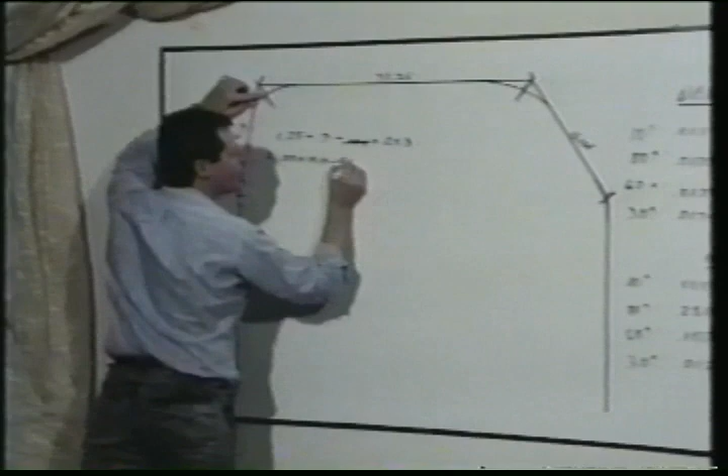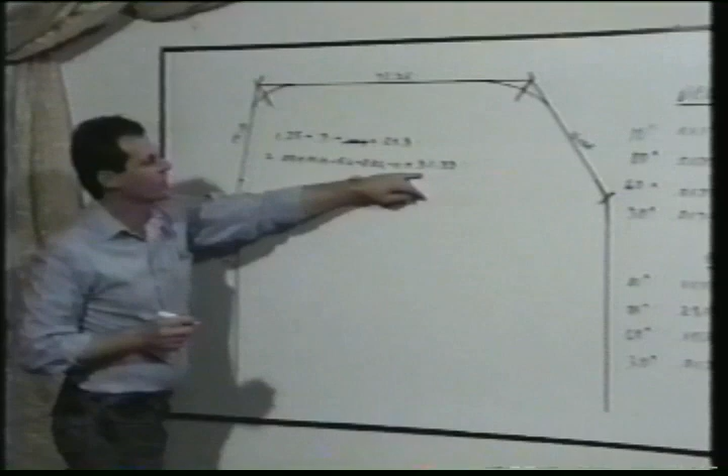Then we have to deduct the gain that we've got in this 80 degree bend. The gain on an 80 degree bend is 2.26. So we subtract 2.26. Next, we have to take the gain down here that we got from this 10 degree bend. Since it was virtually 0, it'd be minus 0, equals 31.33. So this is where our shoe would go, or our starting point for our shoe would go for our 80 degree bend, or our second bend.

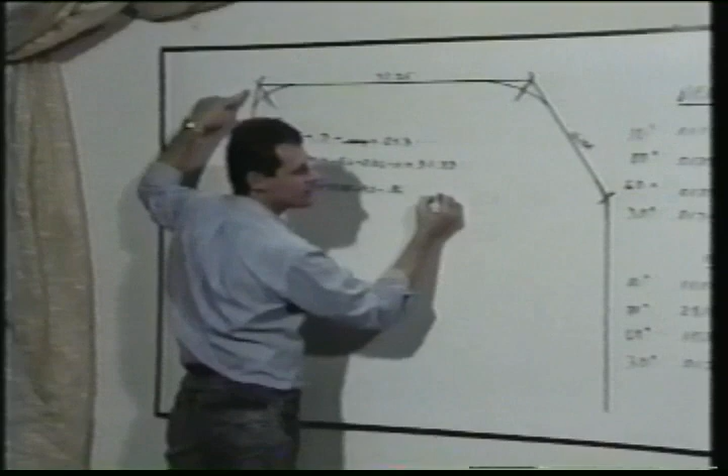For our third bend, we do the same thing. We take our 25 plus our 14.19 plus the distance from the center of our 80 to the center of our 60, which is 32.25. Then we subtract half of the developed length for our 60 degree bend, which is 4.2, minus the gain that we will get in this 60 degree bend, which is 0.86, minus the gain that we got from our 80 degree bend, which was 2.26, minus the gain that we got off of our 10 degree bend, minus 0. We do all that math, and it's going to come out to 64.12 inches.

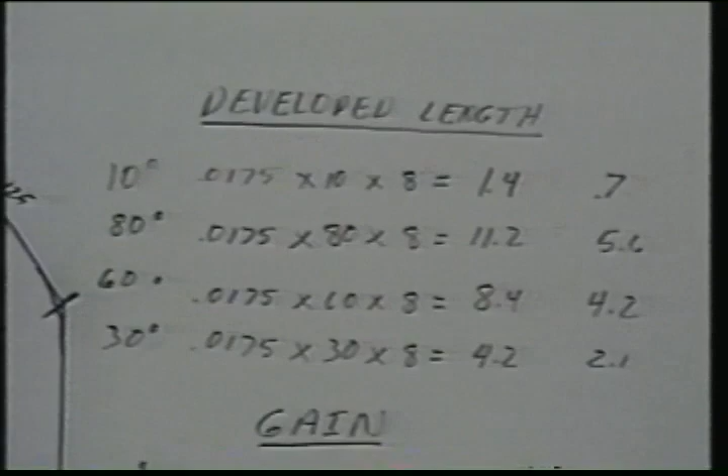For our fourth bend, we just keep stacking our formulas together and we'll come out with it. We have our 25 to our 10 degree, plus our 14.19 to our 80, plus our 32.25 to our 60, plus our 16.125 to our 30. Then again, the first thing we have to take off is half of our developed length, which is 2.1, minus the gain from a 30 degree bend, which is 0.1008, minus the gain from our 60 degree bend, which is 0.86, minus the gain from our 80 degree bend, which is 2.26, minus the gain from our 10 degree bend, which is 0.

And now that math is going to equal 82.24. So as you can see, we've just stacked everything together. We've just gone through and we've come out with where our 4 bends are going to start.

You might be saying, well, why did you keep putting that 0 in our formula? I put it in there because if this had been a bend down here, say a 45, and it had a significant gain factor, you've got to remember to put it in there. If you don't, then these bends aren't going to come out.

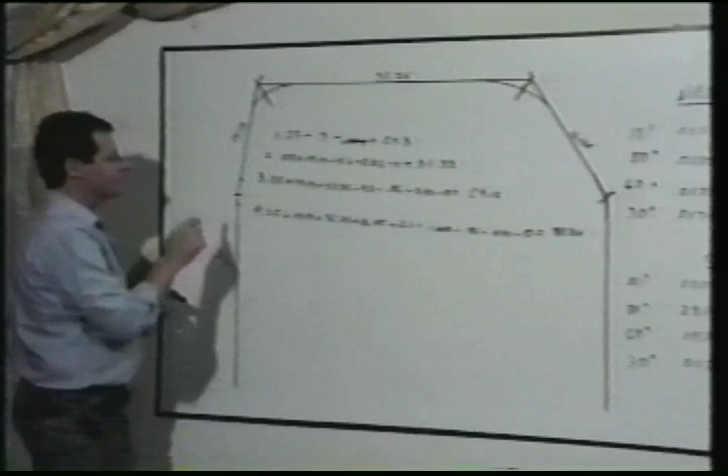So what we're going to do now is we're going to go lay these out on our tubing, chuck it up in the bender, and see how close we came.

We've just spent a tremendous amount of time developing where we want these bends to go. So it's time to lay them out on the tubing here, and we start from the end, and our first one comes back 24 5/16. This time we circled them with a blue felt pen so we make sure and don't lose them. Second one is 31 5/16. Third one, 64 1/8, and the fourth one is down at 82 1/4.

We've got our bends all laid out, but we also have to have our leveling device on. Since we're on 1 3/4 tubing now, we have to go to a bigger Kindorf strap. Here we're going to use a 1.5 inch EMT strap with our same piece of Kindorf. Well, we're all ready to chuck her up in the bender, so let's get after it.

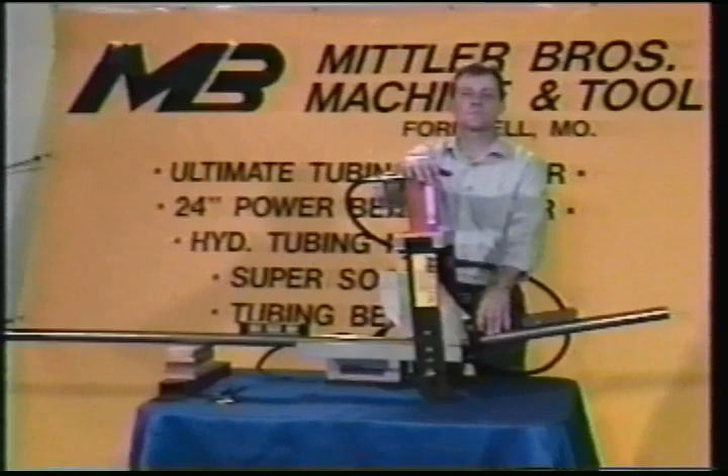If there has ever been a time that you want to be very, very meticulous with making sure and hitting your marks and bending to the exact degree, this is the time. A very minor change in any one of these bends is going to make a major difference in our overall outcome. We're on our first mark here, and we've brought it up to 11 degrees. The reason we stopped at 11 is because anything under a 20 to 30 degree bend isn't going to have near as much spring back as, say, a 60 or 90 degree bend. So we stopped at 11 degrees.

We're going to release our ram, and that drops us down to a 10 degree angle. Let's go ahead and slide it forward, and we'll do our second bend.

Our first bend was a 10 degree bend, and our second bend was an 80. That brings us up, so our stub here is at 90. So we want to bring that over to 92 degrees, so when we release it, it'll come back to an exact 90. Again, we're making sure of hitting our mark and our degrees just right on the button, and making sure our Kindorf stays level. That way we won't have any dog legs. Let's go ahead and release the spring back.

And we've got a 90 degree bend, so we're ready to start our third. We bring our third bend up to 62 degrees, and we're ready to release the spring back on it. And there we've got our 60 degree third bend. That leaves us just one more, and we'll be home free.

At our fourth bend, things got pretty precarious. We had to go out and dig up a piece of pipe here out of the boneyard to slide inside of the tubing we're bending, and we were using this for counterweight. Otherwise, this whole thing would want to tip over. One of the dangers of bending.

What we did was we brought this leg, this vertical leg here, up to 90 degrees exactly, and we stopped. This is because this is our final bend. We can actually use what would normally be taken up as spring back to adjust our whole situation here.

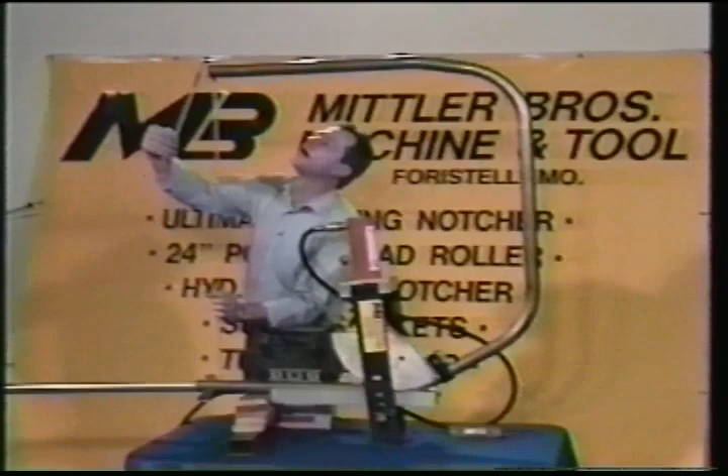All we're going to do is release our spring back. And we'll go over here and measure it again. And that puts us just about 43 3/16. That's close enough for me.

What we're going to do is take it out of the bender, lay it down, and get a very accurate measurement on it. Now, if we had bended up and had been too wide, in other words more than we wanted, what we could have done is taken some more bend in our 60 degree bend or our 80 degree bend. Either one of those would have helped to shrink those down. If we would have been too narrow, then all we can do is pull it apart. So let's go ahead and unload it out of the bender and see what it looks like.

Now that we've got it out of the bender, we can lay it down here and get some accurate measurements. What we want is 43 1/4 inches center to center, same as measuring from the inside of this leg to the outside of this leg. So we'll lay our tape in there, and when we measure it up here, it's 43 3/16. Back here, it's 43 1/4. So we're off by 1/16 of an inch. But in making a U-bend out of 4 different bends, 1/16 of an inch is close enough for me.

We actually left these legs a little bit long because when it sits in the race car — this is the hoop for the rear hoop of a race car — it sits at an angle, so we're going to have to trim those. That's all we have left to do to put this thing in the car.